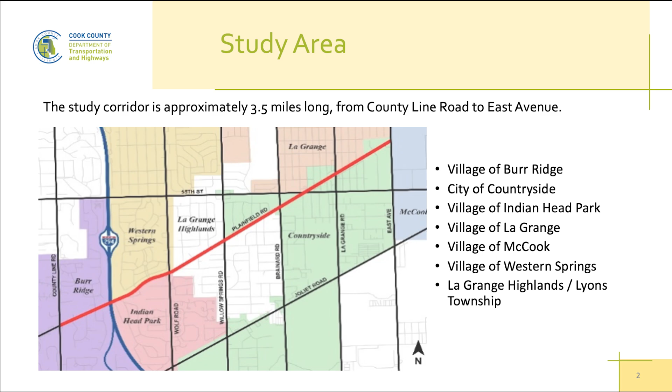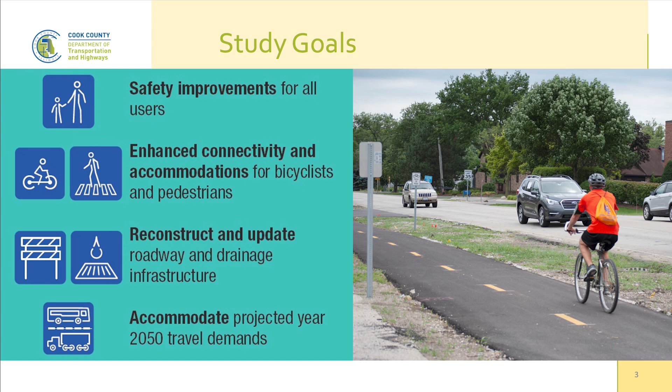This slide introduces the study goals for the project. The purpose is to address existing roadway and drainage infrastructure deficiencies, enhance pedestrian and bicycle accommodations, and improve safety and operational mobility for all users along Plainfield Road. Our pavement is in poor condition, and resurfacing has been performed throughout the past 60+ years, but the underlying core of the pavement needs to be replaced to correct issues. Additionally, there are drainage deficiencies along the corridor with documented flooding, and we've received a lot of feedback regarding the drainage issues.

Additionally, through stakeholder involvement and public outreach, we identified gaps in existing sidewalks throughout the corridor and a lack of east-west and north-south continuity for bicycle facilities. So that has been identified as a need to improve bicycle and pedestrian accommodations throughout the corridor and provide a link to existing and planned facilities in the area.

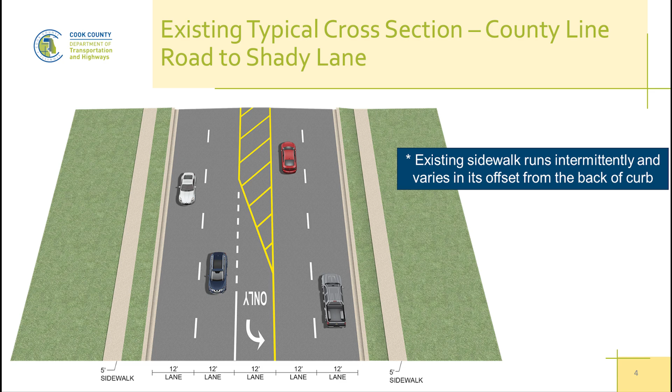As we head further east, the section between Shady Lane and Willow Springs Road has one 12-foot lane in each direction as well as a 12-foot center bi-directional turn lane. There are variable width shoulders, sometimes very undefined and not usable. There's also an open drainage system with shallow swales or roadside ditches. Curb and gutter exist in certain areas on one or both sides of the roadway, and sidewalk runs intermittently.

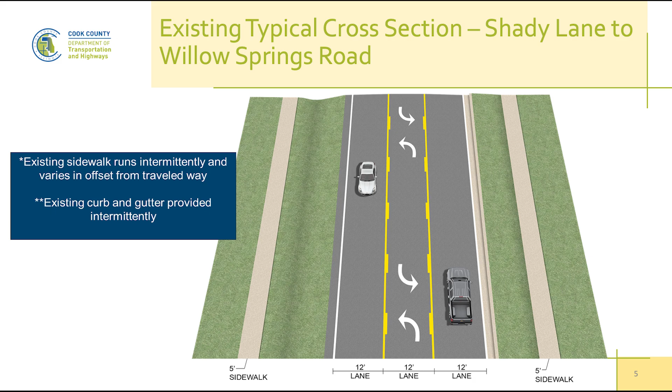This section encompasses most of the existing project corridor. The section from Willow Springs Road to East Avenue consists of one 12-foot through lane in each direction, with variable width shoulders on both sides of the roadway and open drainage via shallow swales or roadside ditches. Existing curb and gutter is present on one or both sides in small segments, but the majority is just shoulder, and sidewalk is also very intermittent, with a lot of gaps in the corridor.

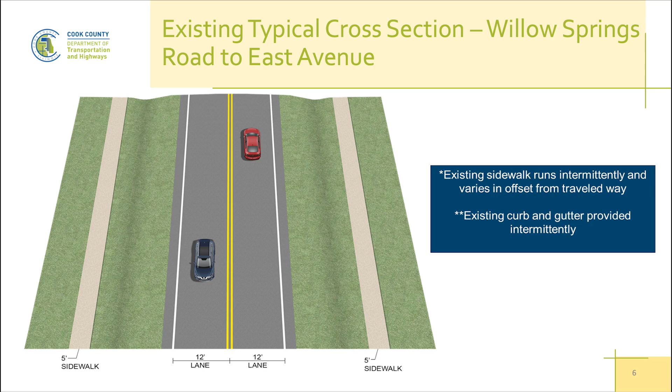So what we're planning to do is create a consistent cross-section through the majority of the corridor. The section at County Line Road will remain as existing, other than the inclusion of sidewalks and shared use paths. For the rest of the corridor, we'll include three 11-foot lanes, including a center bi-directional turn lane, and we'll be adding curb and gutter. We'll also be making improvements at each signalized intersection to accommodate 2050 traffic volumes, modernize traffic signals, make them ADA compliant, and create a better facility for all users.

Sidewalk will be provided along the north side throughout the whole corridor, and we're planning a shared use path for bicyclists and pedestrians along the south side all the way from County Line to East Avenue. We'll also be providing some locations where pedestrians can cross at mid-block locations, other than at the signalized intersections. Drainage improvements, which Adam will talk more about, include a closed drainage system with new storm sewers.

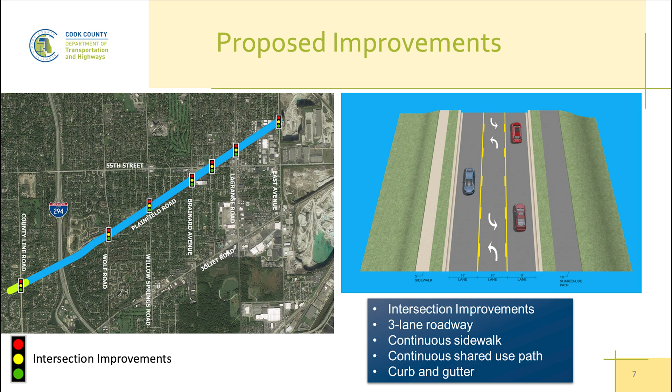I wanted to point out that there is a bridge over the I-294 tollway, which was recently constructed through coordination with the county, so we'll be tying into that improvement. The only thing we'll be doing at the bridge will be retaining wall expansion to accommodate the path and the sidewalks.

One thing about that bridge over 294, you may notice there are provisions for a shared use path or bike path on one side of the bridge and a sidewalk on the other. There was a lot of design effort and coordination by our department with the Illinois Tollway to make sure that project was forward compatible with the community should they extend those facilities in the future.

The Plainfield Road corridor spans two watersheds. Basically, Willow Springs Road is the divide. So everything east of there flows to McCook Ditch or Summit Conduit, and everything west of there flows to Flagg Creek.

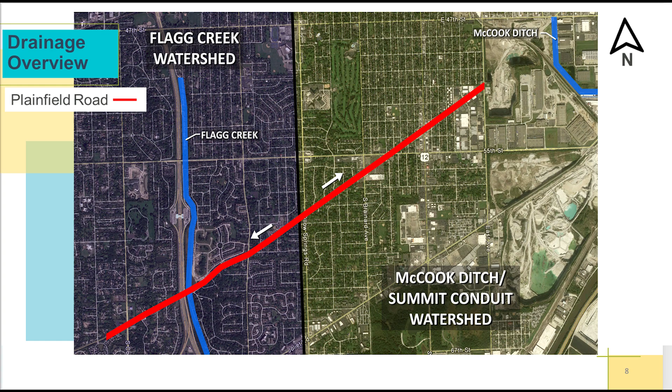As Sanjay mentioned, there will be a new closed drainage system out there, so there'll be curb and gutter and storm sewer throughout the corridor. That'll improve the drainage in parkways and make them easier to maintain as well.

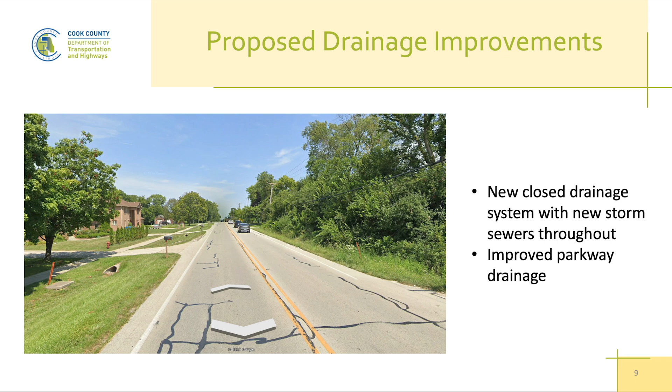Detention will be provided to mitigate stormwater impacts from the project. In advance of the project, we've coordinated with IDOT to have a portion of the storm sewer they're installing as part of their 55th Street at La Grange Road project upsized. MWRD did something similar, partnering with IDOT to oversize some of the sewers east of that location. So we'll have a forward compatible, continuous, enlarged storm sewer running from Plainfield Road to East Avenue.

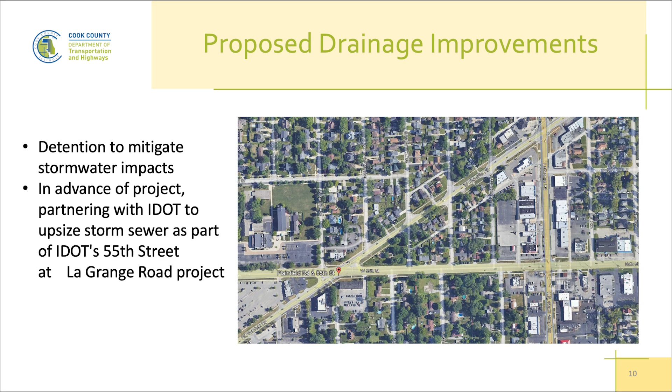Next, I'm going to talk about our public involvement process and schedule for this project. We initiated the project back in 2020, which included a corridor advisory committee made up of stakeholders and municipalities throughout the corridor. We've been engaged with them throughout the onset of the project, starting with our first meeting in September 2020, and another meeting in March 2021. We anticipate holding one more meeting with our corridor advisory committee in spring of this year as we're completing the study.

One-on-one meetings will have been held with all the municipalities, many of whom are here today, that we've been coordinating with. We'll also be talking one-on-one with some of the property owners where there will be impacts worthy of discussion with them individually.

As far as public meetings, we had our first public meeting back in 2021 during the COVID times. It was a virtual meeting. We are going to have an in-person meeting this summer where we'll be presenting our proposed improvements to everyone along the corridor. And then we're anticipating design approval in fall of 2025.

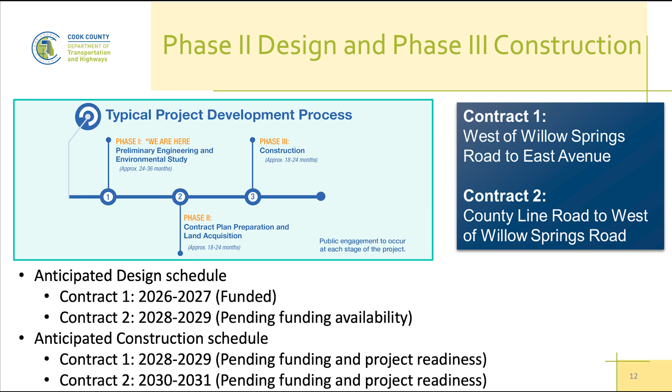So thank you. I just wanted to point out, the beginning of the slide had it, we have a project website called improveplainfieldroad.org. If you want more information, a lot of the info you see here is on there or will be added there later as we proceed with more meetings. So I'm going to hand it over to Adam to talk about some other initiatives. Thank you, Sanjay.

Most of you are probably familiar with this, but just in case, some background: the American Rescue Plan Act, or ARPA, was a federal law signed in 2021. Cook County received a little over $1 billion in state and local fiscal recovery funds. The county developed 74 impactful and transformative programs to invest those funds into communities, residents, and businesses throughout the county.

One such program is our $20 million Stormwater Management Project Implementation Program, and with the assistance of MWRD, we're implementing a lot of those projects.

One other program our department is leading under ARPA is the Invest in Cook Expansion Program. If you're familiar with our Invest in Cook program, that's funded by motor fuel tax funds, so there are restrictions on what can be done with those funds. The Invest in Cook Expansion was a one-time opportunity to do a broader suite of infrastructure projects, so that was another program we developed to utilize the ARPA funding.

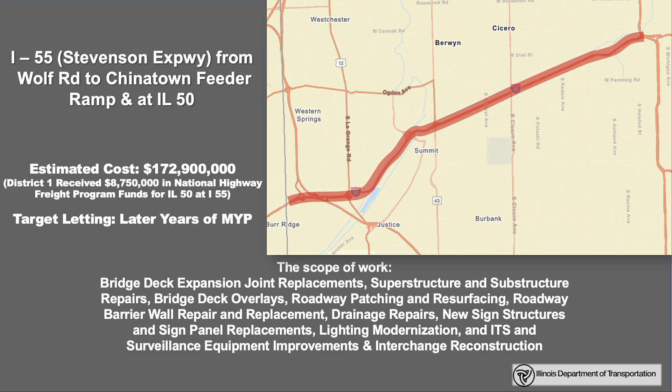We do have some upcoming constructions from our phase 1 and phase 2. The biggest one is I-55, from Wolf Road to Chinatown feeder. We broke this contract, about 175 million so far, and it's growing, by the way. We broke this into 4 contracts: the first for both bounds from Wolf to 50, then the interchange of 50 at I-55, and then 2 other contracts, inbound and outbound from 50 to Chinatown feeder, outbound to 50. That totals our 4 contracts. We do have a DCM, a design corridor manager, that oversees this in phase 2.

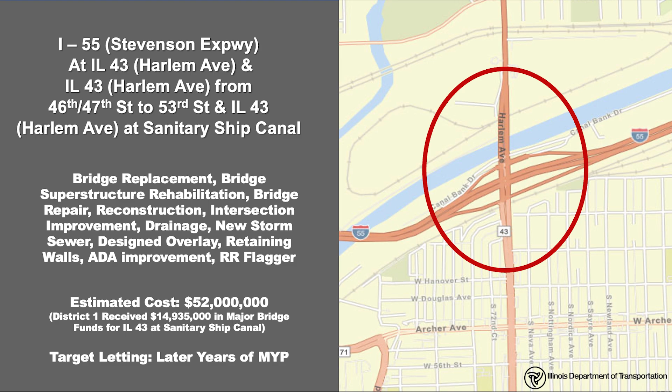The second project is 55 at Illinois 43, and also along 43 from 47th Street to 53rd, and Illinois 43 at Sanitary Ship Canal. This is a bridge replacement, bridge superstructure rehab, and drainage - new storm sewers, design overlay, retaining walls. As part of this project, the department is partnering with MWRD and Forest View by upsizing a large sewer at a cost of over $3 million. The proposed sewer runs from the viaduct up north of the map to the Sanitary Ship Canal to further reduce regional flooding in the Forest View area of the viaduct.

The other project is Illinois 43, from 63rd Street to 65th Street and at BRC Railroad. This is a railroad grade separation intersection. This project also has an overpass - the roadway overpass carrying 65th Street over the BRC Railroad and joining with the raised intersection at Illinois 43 and 65th Street. Drainage improvements on this project include a 72-inch sewer, outfall sewer from 63rd Street to Archer Avenue, by Archer Road intersection detention basin.

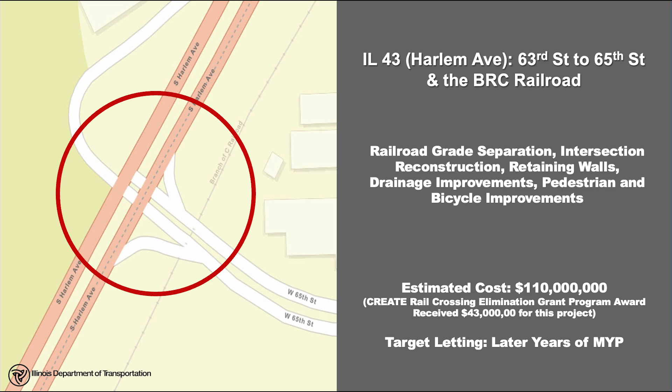A distance of approximately 1.5 miles. This outfall sewer is designed with extra capacity to allow MWRD to connect in the future some sewer separation projects to the proposed outfall. In addition to the 72-inch outfall, a new sewer is being proposed from Harlem at 65th Street that will run north to Archer Avenue and create a new outfall. The department is coordinating with Summit and MWRD on regional needs for this. This is estimated about $110 million.

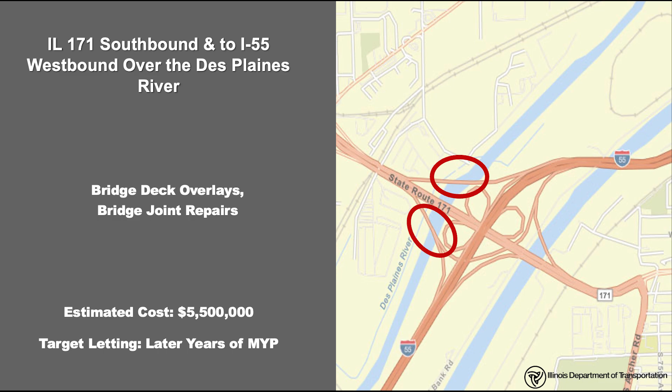Another project in programming is Illinois 171, southbound to I-55 westbound, over the Des Plaines River. This is a bridge deck overlay and some joint repairs. This is estimated about $5.5 million, and the target letting is in the later MYP. Later MYP means the last 2 years of the fiscal year of 25-30.

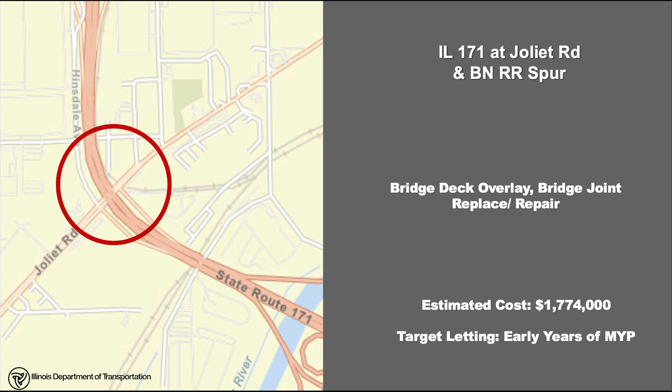Another project is Illinois 171 at Joliet Road and BN Railroad spur. This is a bridge deck overlay, bridge joint replacement and repairs. This is estimated at $1.774 million, and target letting is early years of the MYP. This means next year or the second year after, 26, 27.

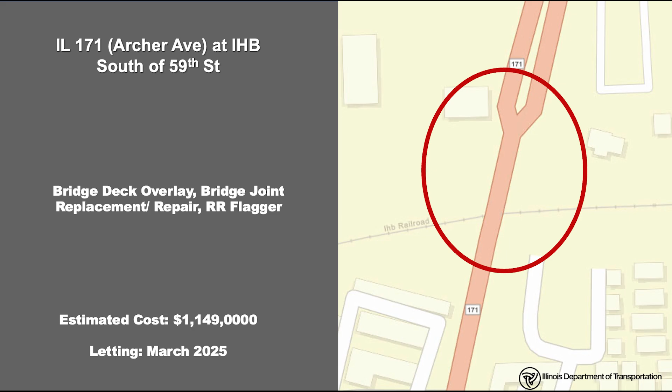Illinois 171, Archer Avenue at IHB, south of 59th Street. This is a bridge deck overlay, bridge joint replacement, repairs, and it has also some coordination with the railroad for railroad flaggers, estimated at $1.15 million, and the letting is next month, March 25.

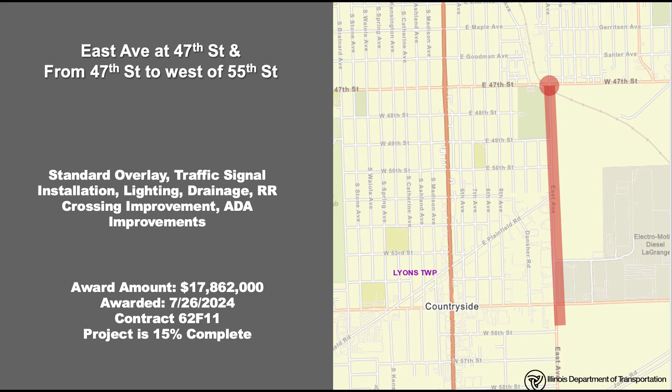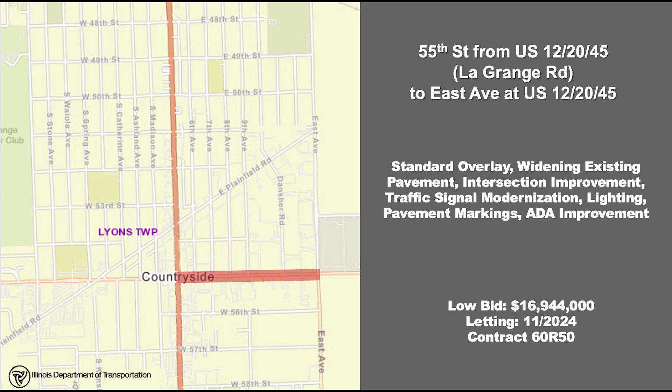Another one is 55th Street from US 12/20/45, which is LaGrange Road, to East Avenue at LaGrange Road. This is a standard overlay, widening, intersection improvements, traffic signals, modernization. This project is scheduled to start fall 25 in coordination with the East Avenue project, with a completion date of late summer 27.

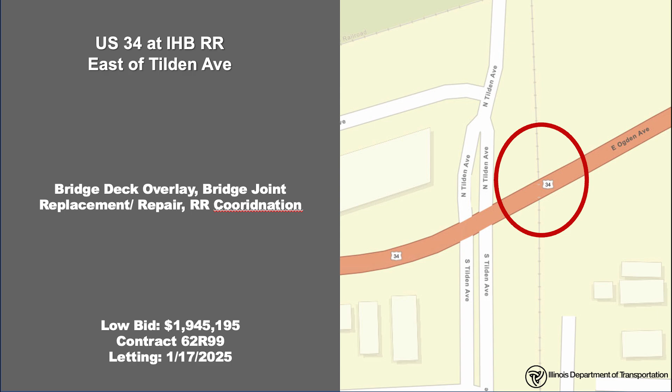Usually awarding time is about 6 weeks max. So this bridge repair project consists of joint repairs, and hopefully the project is scheduled to start in '25, in coordination with the East Avenue project, with a completion date of spring '26.

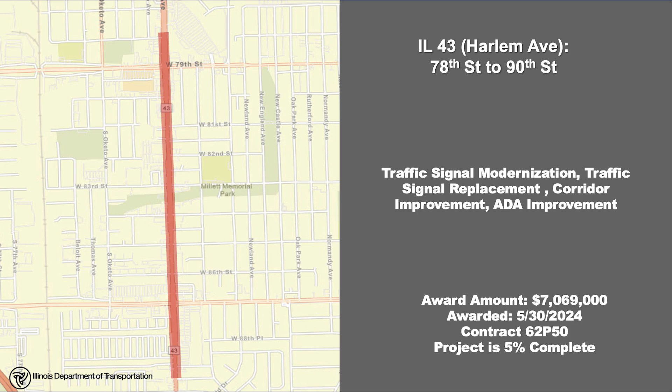Illinois 43, Harlem Avenue, from 78th Street to 90th Street. This is a traffic signal modernization, some traffic signal replacement, corridor improvement. This project currently is at 5% complete, with work scheduled to resume in spring '25, with a completion date of fall '25.

I think this would wrap up our projects currently in the township. Thank you for having me.

Thank you, Wisdom. Certainly a lot of projects going on throughout the township, administered by IDOT, which we appreciate. I know many of you know about the 55th Street project through McCook, as well as the East Avenue project through Hodgkins and Countryside. It was brutal while it was going on, but it's nice when it's done, and it's worth the wait, so we appreciate that.

We have a lot of engineers in the room today. I know there are engineers representing different municipalities and forms of government. I know we have the principal from Hancock, Derek's here with us today, as many others. We have Tom Branstad from Novotny Engineering. We also have Angel Hernandez.

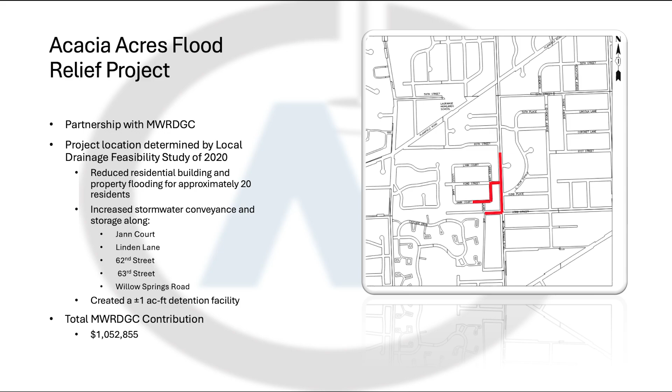Every year for the past few years, the township has done drainage improvements along the unincorporated areas of the township. How it kind of works: the township highway department identifies areas that experience flooding within the township and performs roadside stormwater improvements. Over the last few years, these improvements include 55th Place, 58th Street, 59th Street, 62nd Street, and 63rd Street. Some of the improvements also complement the Acacia Acres project.

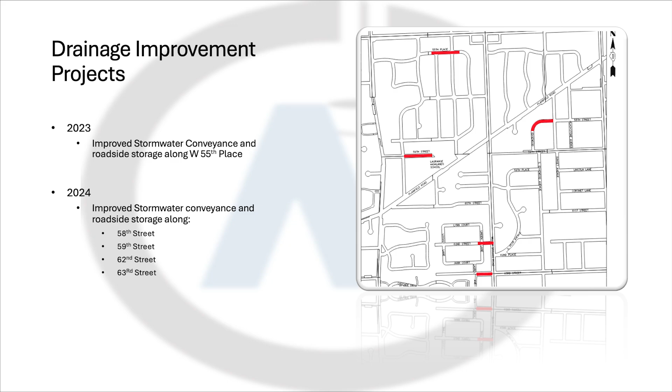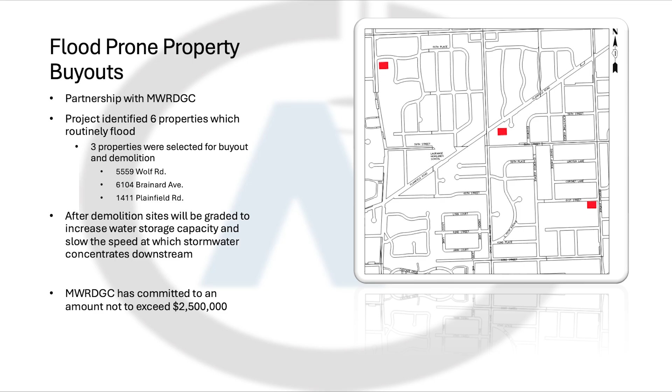And this year, the township has again partnered with MWRD, where we identified 6 properties that are prone to flooding. 3 of these properties were selected for potential buyout and demolition. Once the properties are demolished, they will be graded to provide additional stormwater storage for areas upstream of the property. Now moving on to the City of Countryside.

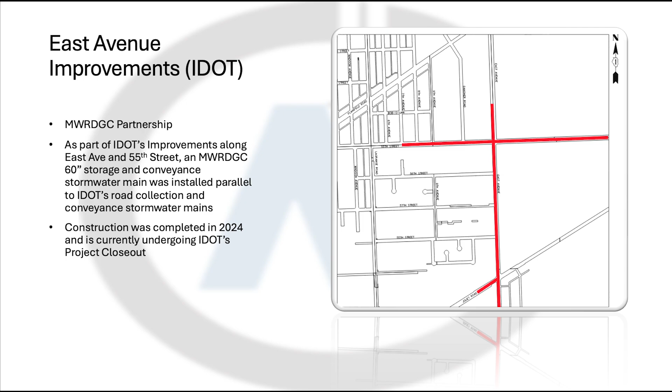But City of Countryside, this is the East Avenue improvements performed by IDOT. This project also included improvements along 55th Street. As part of the project, IDOT partnered with MWRD to design and install a 60-inch RCP stormwater collection system to improve drainage along the corridor and the areas along it. Construction is currently complete and in close-out by IDOT.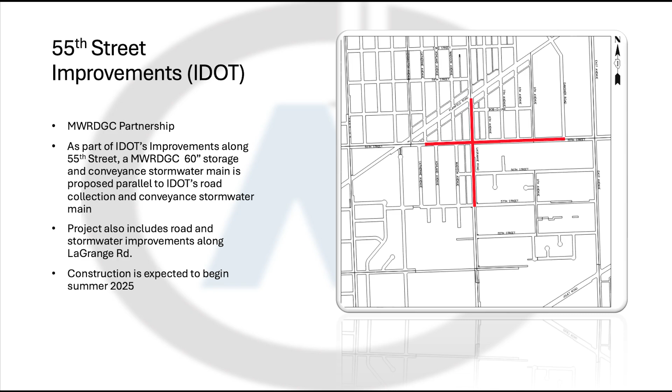Next is the 55th Street improvements by IDOT, again in partnership with MWRD. IDOT is adding to that 60-inch stormwater conveyance system, which will improve drainage along the rest of 55th Street up to Plainfield Road. This project is deemed to start construction summer of 2025.

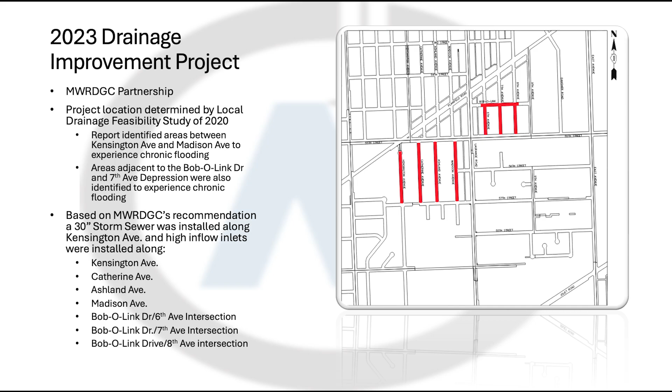Thanks, Angel. A couple other projects that we've been involved with in the Village of Lyons, next slide, please.

This was a partnership with MWRD, reconstruction of 5 alleys using green infrastructure, primarily permeable pavers. This project provided additional storage and took some relief out of the combined sewer system for the Village of Lyons. MWRD contributed almost $700,000 towards this project.

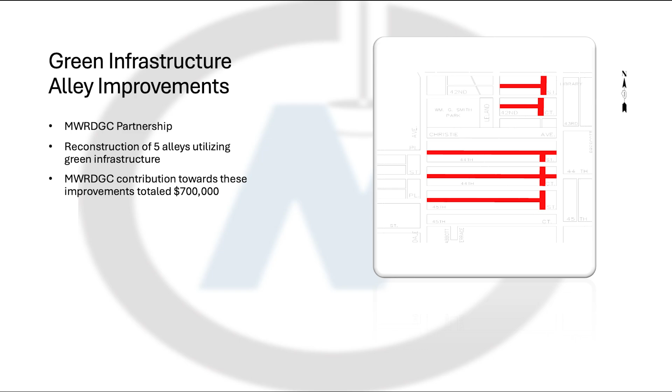Next project coming up for spring of 2025 is located in the Village of Willow Springs, and this involves the reconstruction of the Village Town Center using green infrastructure, primarily permeable pavers for the new pavement. MWRD has committed over $1 million towards this project, and the goal is to provide some relief to the storm sewer system in the area. Thank you.

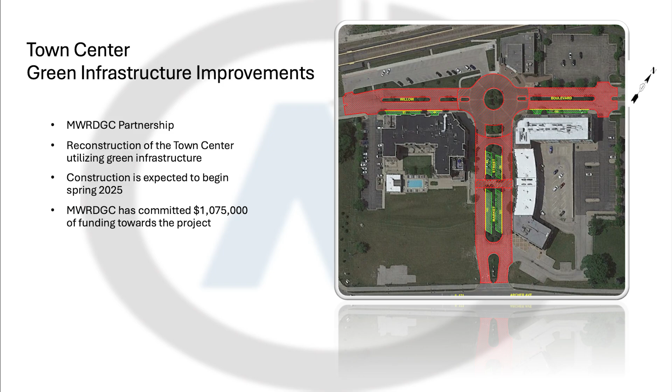Thank you, gentlemen.

All right, next we have the Metropolitan Water Reclamation District, who are well represented here today. We have their senior engineers who are here, and they're going to speak. We have the Executive Director, Brian, with us. We have one of their newest commissioners, recently appointed by the governor to her position, Beth Kirkwood, everyone. And we also have our vice president here with us today, Teresa Flynn.

I know the congressman made it clear that we can't count on federal funds, so we're looking to MWRD to fill in the gap. All right, Teresa, it's all yours.

No pressure. I'll take it down here, otherwise I can have a Mary Catherine Gallagher moment trying to get out of my seat. Thank you for having me.

Thank you to Township Supervisor Getty, Clerk Koffenberg, and Assessor Hines, Highway Commissioner, Mayor McDermott, and Congressman Casten for inviting us here today. As the Mayor mentioned, Beth is our newest member on the board, but we brought the bus driver of the agency, Brian Perkovich, our Executive Director, and the brains of the outfit, Dr. Catherine O'Connor, Kevin Fitzpatrick, and Joe Kratzer, our engineers. So I'm so pleased to be standing with them.

And I'd also like to recognize we have a former MWRD member, Dan Pogorzelski, in the room, who loves all things water too. He's at the back of the room. Thank you, Dan, for joining us today.

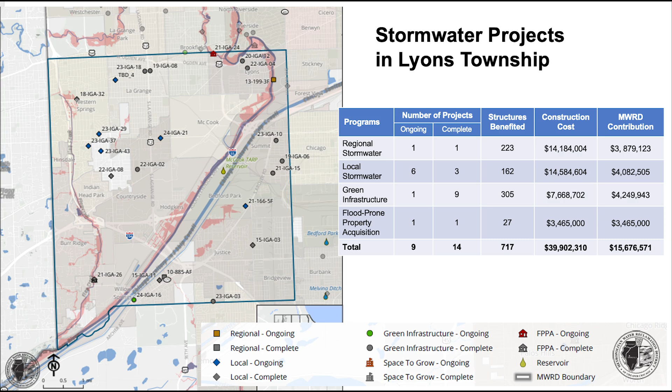I'm an engineer in the stormwater management section, and I'm just going to run through a few projects and give you a little bit of overview, trying not to repeat any information you already heard. I'll start with a slide showing how busy we have been in Lyons Township. You heard about these numbers already, but we're very proud to be able to leverage both local efforts and state and county funding, as well as federal funding for many projects. So we have, as was mentioned, tens of millions of dollars of investment leveraging those partnerships to accomplish all these projects. Let's go over a few examples.

Again, some might be a little repetitive, but the first one is the Lyons and McCook levee improvements. If you've been down in that area, McCook and Forest View, improvements have already started and some completed along the northern portion of the levee and some on the southern portion of the McCook levee. Those are done by the Army Corps. We were asked to help out with this middle section just south of 47th Street, and we're working to finalize a couple agreements with the railroads right now. We'll be putting this project out to bid in the next couple months.

This is a project I wanted to mention—on that last project and several others, we leveraged some ARPA funding through our subrecipient agreement with Cook County, so that was one of them.

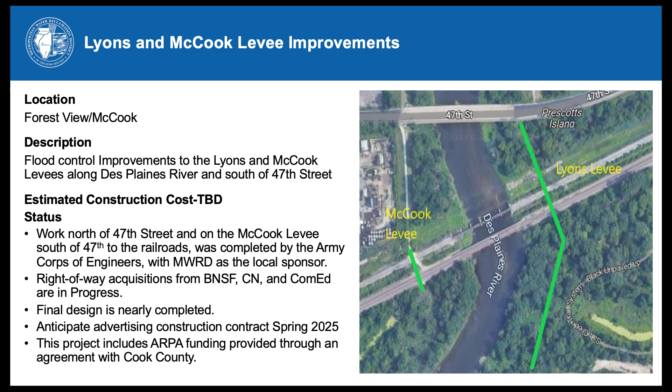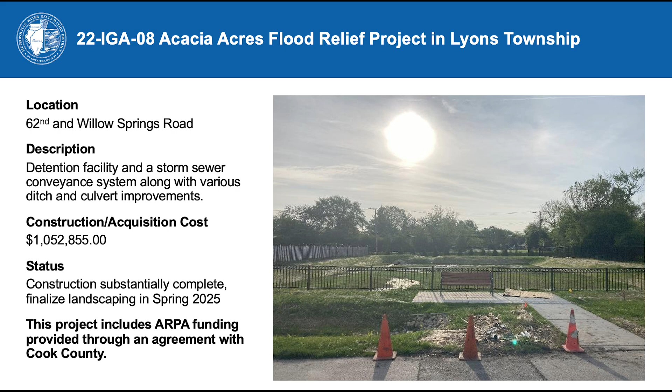The next one is Acacia Acres. You already heard about this one, not much more I could say, although this was another project where we were able to leverage some ARPA funds. The next one is one of our flood-prone property acquisition projects.

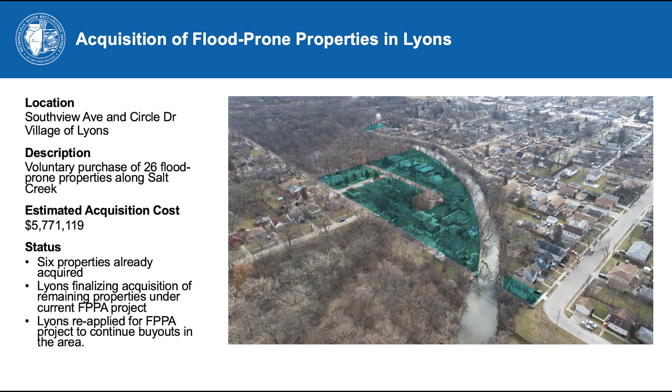You can see Salt Creek here in the background in that neighborhood in blue—that's all floodplain area. There's a couple dozen homes in that area subject to repetitive loss flooding, and we've partnered with the Village of Lyons, targeting 26 properties, and so far we've acquired 6 of those, with more to come.

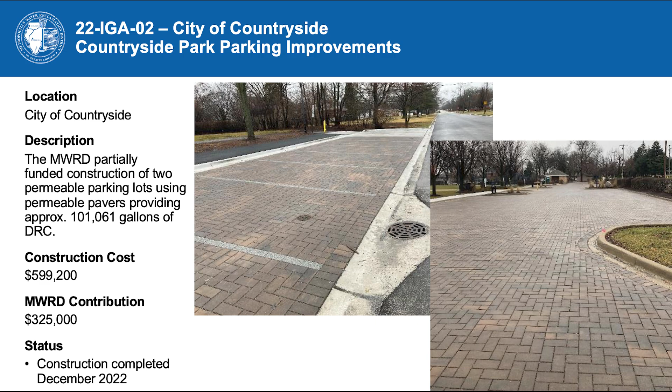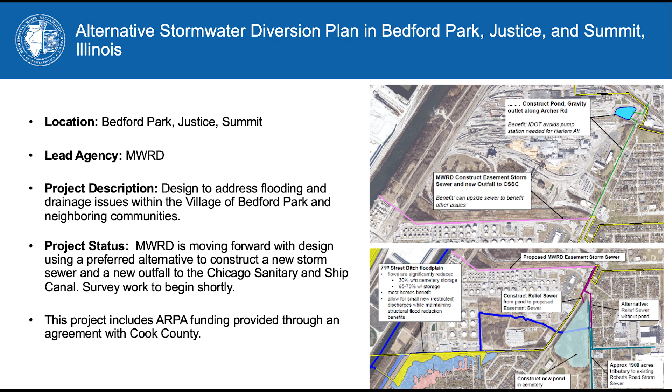Next, I want to give you an overview of all our stormwater partnership programs. You've seen some examples of these projects, but we have our stormwater partnership program, which looks to communities to find out what projects they're already working toward implementing, and asks how can we help bring those across the finish line and get them constructed. We've partnered with several communities out here and across the county to successfully implement traditional stormwater management projects—storm sewers, detention, pump stations, that kind of thing.

Our green infrastructure program, you saw some examples of that already—in Countryside we've done green alleys, green parking lots, more nature-based green designs all across the county, and that's a great program. Our flood-prone property acquisition program targets flood-prone areas in the regulatory floodplain. Last up is our conceptual program. The main idea behind it is to help communities and other agencies that may not have the resources to address a flooding problem, or even identify what the solution could look like, by analyzing different alternatives, bringing those concepts to a design phase, and working to get them built.

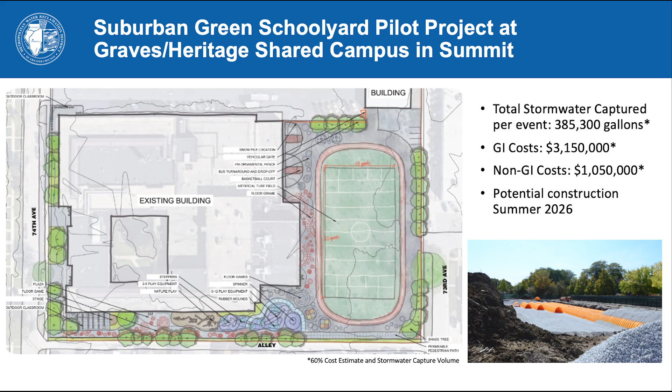Before I turn it over to my colleague to talk about TARP, I just wanted to mention that we've partnered with many of the municipalities, the township itself, and other agencies here. We are working very hard to streamline a lot of our processes. I hope you'll consider us if you're thinking about doing a project, and look for our applications. If you have any questions, please feel free to reach out. Thank you. I'll turn it over to...

Okay, thanks. I know it's been a lot of information over the last hour or so. I'll be quick. I want to thank you guys for putting this on. This is a great event every year, and we appreciate the opportunity to speak out here. I'm going to give a brief update on our TARP project, which is really our flagship stormwater project at MWRD that's been going on for decades.

TARP is a tunnel and reservoir plan, a deep tunnel system to capture the pollution previously caused by combined sewer overflows, where every time it rained the storm sewer would get overwhelmed and mix with domestic sewage from people's homes. There was no capacity at our treatment plants to handle this water during a storm, so overflows would occur. About 100 days per year, we would have raw sewage going into one of the waterways around the Chicagoland area. So the deep tunnel plan was conceived to capture that water before it made it out to the waterway, in a deep tunnel following all our waterways—like another river underground—leading out to a reservoir.

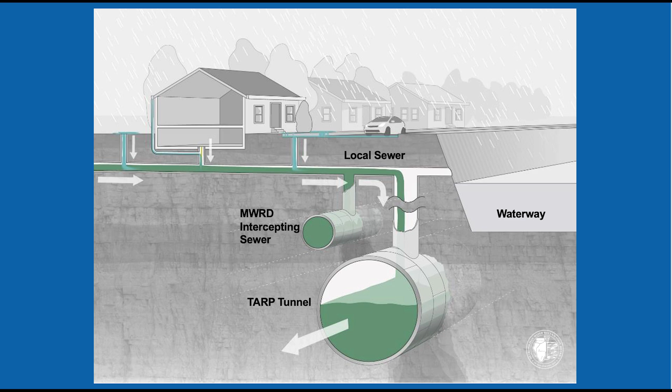Next slide, please. So the tunnels were completed in 2006, and we've been working on the reservoirs since. We have 3 major reservoirs, where we store the bulk of the water. The McCook Reservoir serves this area of Lyons Township, and it is the final remaining piece in the puzzle. We completed stage 1 of the McCook Reservoir in 2017, bringing 3.5 billion gallons of storage for this combined sewer overflow online. We are currently working on stage 2 to expand this reservoir from 3.5 billion gallons to 10 billion gallons in capacity.

We're all set to go. As soon as that can get mined out, we will put it online, and it will really help capture more of that combined sewage overflow.

So what will that mean for Lyons Township? Portions of the township, the older portions, have combined sewer systems where the stormwater is mixed with domestic sewage. Those portions will get better protection from things like basement backups when stage 2 comes online. So we are excited to get that online.

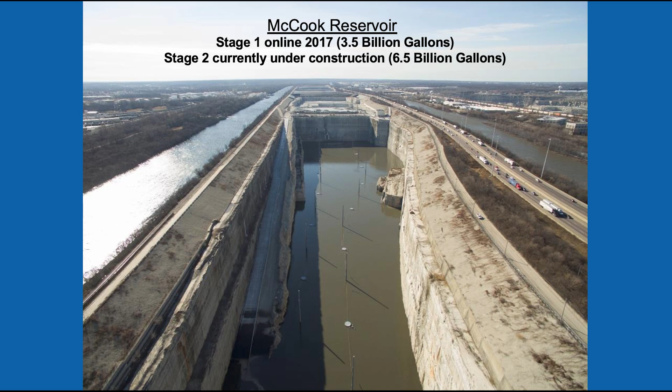Unfortunately, we're at the mercy of how quickly that hole can be mined, which is being done by one of our local quarry operators, Vulcan, and all the stone there is sold out of their quarry. So hopefully our friends at IDOT and Cook County use a lot of that stone quickly, so we can get it mined up faster. I think that's all I have.

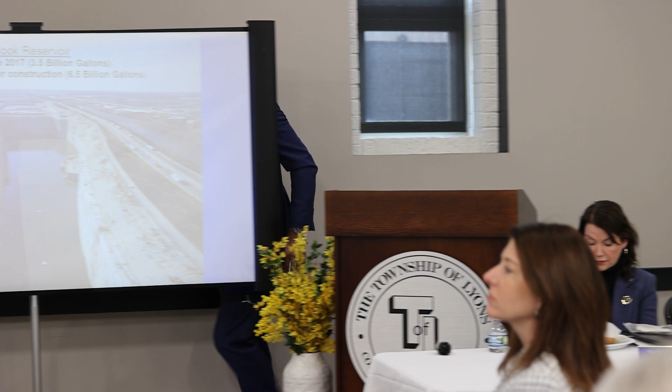Other questions burning on your mind about flood-prone properties?